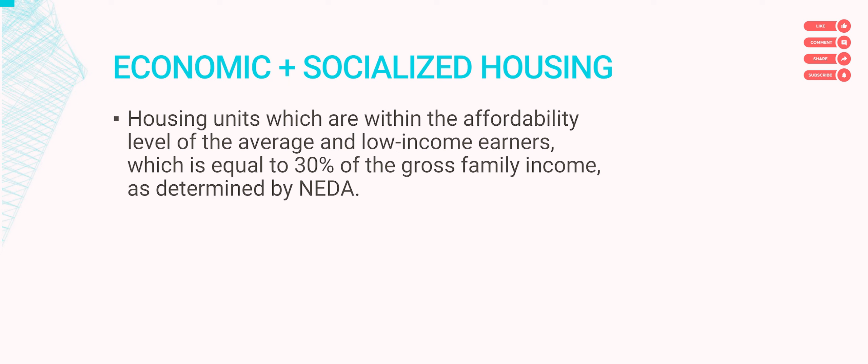According to BP 220, these are housing units which are within the affordability level of the average and low income earners, which are people who can set aside 30% of their gross family income as determined by the NEDA. It's important to emphasize that the standards for low-cost housing or socialized and economic housing are not the same as the standards set by the other laws.

We're going to emphasize that now. The standards for BP 220 are different from the standards of PD 957, PD 1216, PD 1096, which is the building code, and PD 1185, which was the old fire code. The new fire code is RA 9514, but the standards are not the same as in the fire code.

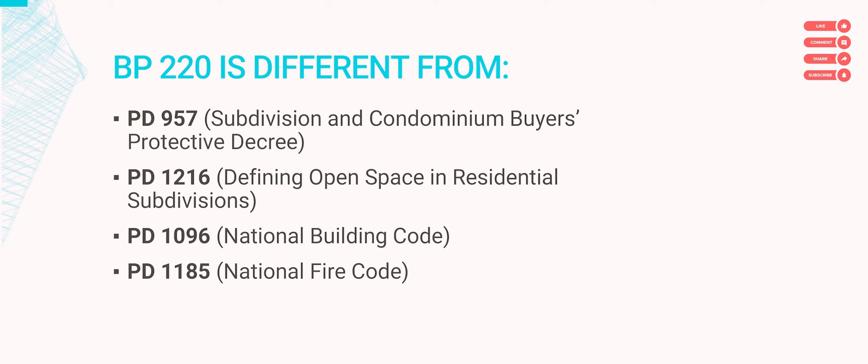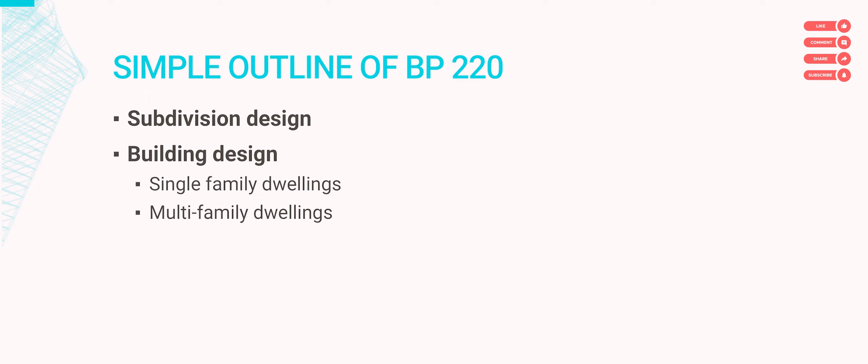So a quick outline of BP 220 before we begin. It's basically two parts. The first part is subdivision design, the second part is building design. In the first part, we'll talk about designing the subdivision, roads, etc. And then we'll focus on the house or the building itself in the second part.

But before we start with the first part, let's quickly talk about this. According to BP 220, the basic needs of human settlements are these six, and they're arranged according to order of importance, most important at the top going down. So the most important is water, followed by movement and circulation, then storm drainage, solid and liquid waste disposal, parks and playgrounds, and lastly power.

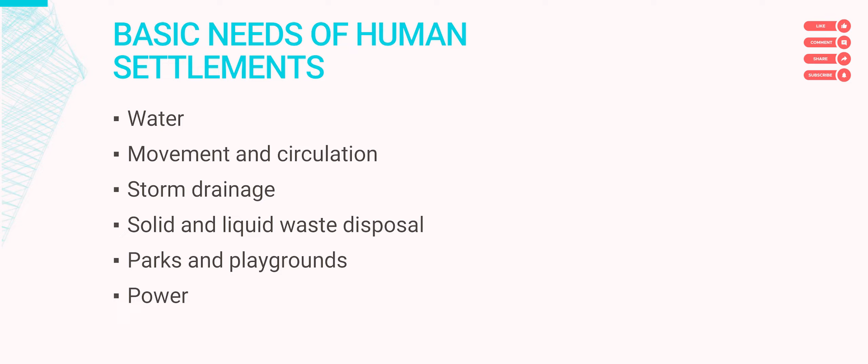Okay, let's define a few key terms. I'm not going to cover all of the terms that were defined by BP 220, but let's go over some of them, the ones that are important to our discussion.

So the first term is socialized housing. These are housing projects undertaken by the government for underprivileged and homeless citizens. The important things to remember here are the words underprivileged and homeless, because that's what really sets this apart from economic housing, which is defined as housing projects provided to average income families.

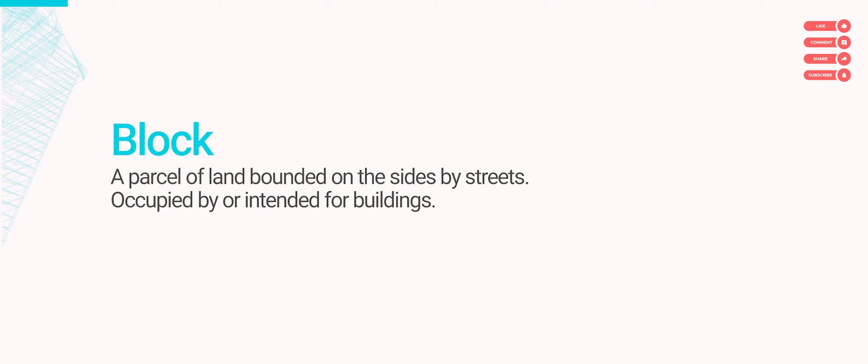We'll also encounter the word block a lot later, so let's define that. A block is a parcel of land bounded on the sides by streets, occupied by, or intended to be occupied by, buildings. So it's land with roads on all sides. Typically, it's going to be subdivided into lots.

Next term is shell house. A shell house is a habitable dwelling unit that includes the following: all exterior walls, the floor, openings for doors and windows, plumbing fixtures, and electrical wiring.

This term, shell house, might make more sense if you know there's another term, complete house. First the shell house: it's a term for a state of the house that's being constructed. Like, when you're building the house, you get to a point where the house isn't yet done, it's not yet fully built, it's not yet complete, but the shell of the house is already there.

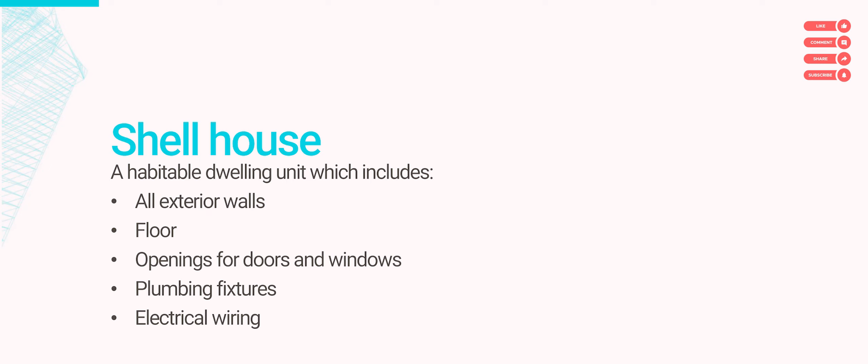So when can you say that the shell is already there, when do you say that you already have the shell house? Again, when these things are present: the exterior wall is done, the floor, door and window openings, plumbing fixtures, and electrical wiring. One thing they didn't mention, which I'm assuming is part of the shell, is the roof. Let's just assume the roof is also complete, because it wouldn't really be a shell without the roof. But bottom line, once these are there, then the shell's there.

Complete is when you have the shell plus the doors and the windows, since door and window openings are all the shell has. With the actual doors and windows there, plus the shell, plus the partitioning, and all of the other things that need to be constructed for the house, then the house is said to be complete.

Okay, let's begin. So two parts: Part one is subdivision design. First, some important planning considerations for subdivisions, like when you're planning the subdivision, these are the things that you need to consider.

First, try to choose a location that's safe, not subject to flooding or to other hazards. Try not to cut down trees that are too big. It's stated that if the diameter of the tree is 200 millimeters or greater, try to preserve the trees.

In the real world, there are rules - yung mga LGU, may kanya-kanyang rules sila usually regarding cutting down trees. You usually need to obtain permits to cut down trees when they're of a certain species, diameter, size, or age. It varies LGU to LGU, but the point is, in BP 220 nakalagay, diameter of 200 millimeters or more dapat i-preserve.

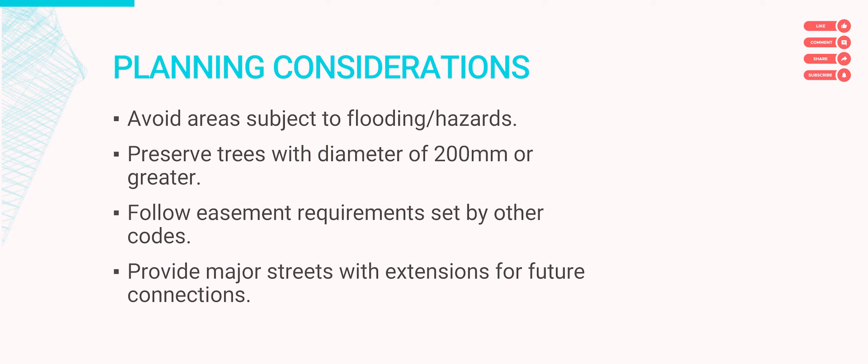Next, follow the easement requirements set by the other code. For this, you'll have to check the building code and the water code. And provide major streets with extensions for future connections.

Another important thing to say this early is that in BP 220, there is no fixed ratio between saleable and non-saleable lots. We have to say that kasi later sa PD 957, meron kasing ratio na ibibigay, parang 70-30 ratio. Pero here in BP 220, there's no such thing. Walang ratio between saleable and non-saleable lots.

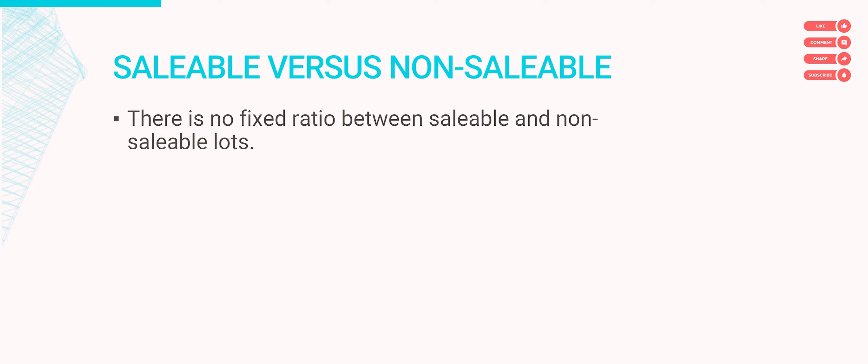Okay, next, parks and playgrounds. Let's take a step back. Yung saleable component ng subdivision is literally yung pwedeng ibenta, yung lote, natatayuan ng bahay. Yung non-saleable components, according to BP 220, is divided into three subcomponents: the parks and playgrounds, the community facilities, and the roads. So isa-isahin natin yung tatlong yun to check if they're required or not. The first one is parks and playgrounds, the first non-saleable component.

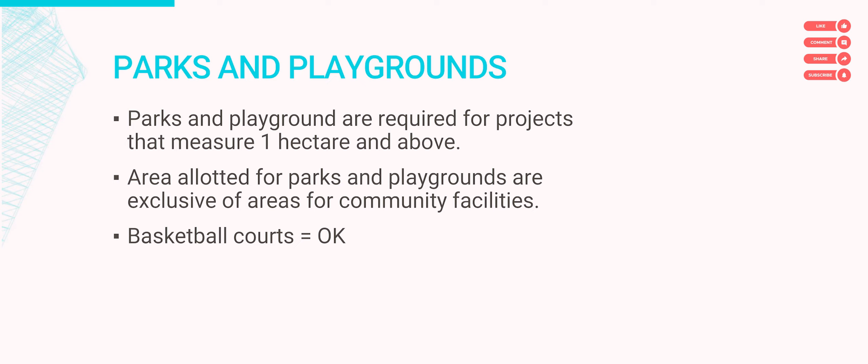Parks and playgrounds are required for projects that measure 1 hectare or above. Subdivisions 1 hectare or bigger dapat may parks and playgrounds. These are to be provided separately from community facilities. Normally po sinabing parks and playgrounds, open spaces yan, green spaces yan. Pero just to be clear, BP 220 is very clear about it - basketball courts may be provided as part of the parks and playgrounds requirement.

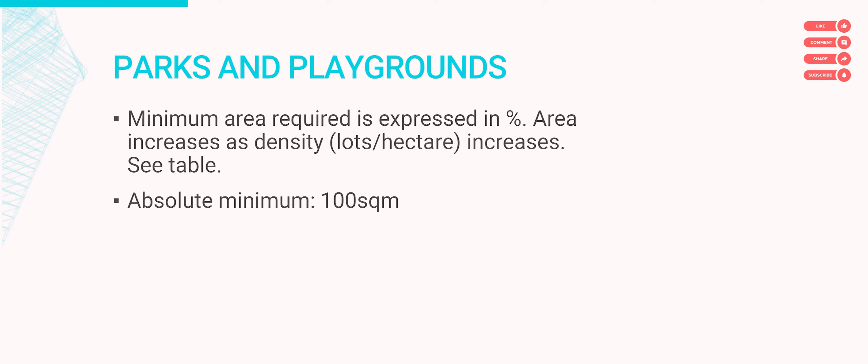Okay, so how big should it be? Because we know when it's required, diba? Kapag daw yung subdivision is 1 hectare or bigger. So how big should it be? There's a table telling us ilang percent ng subdivision yung dapat gawing parks and playground, but the absolute minimum is always 100 square meters. Whatever the percentage is, if you follow it and it gives you a lower number than 100 square meters, you have to bring it back up to 100 because it cannot be less than that. So ito yung table na yun.

So depending on the density of the subdivision, merong prescribed percentage as to how much of the subdivision should be converted to parks and playgrounds.

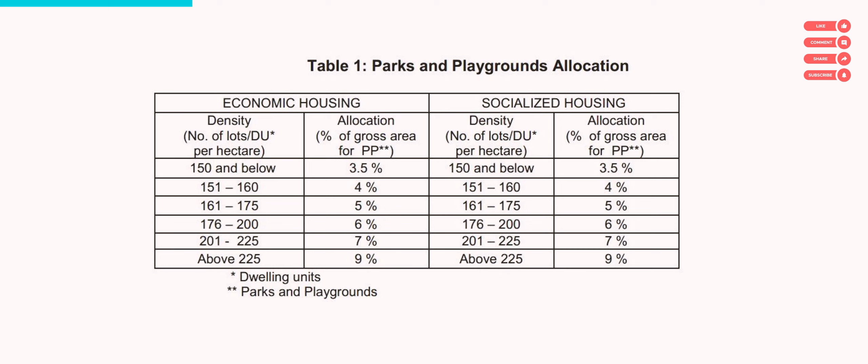Next non-saleable component is the community facilities component. Pagdating sa community facilities, we have a list of facilities that may or may not be required. Let's start with the most basic one, yung multi-purpose center. Ang sabi ng BP 220, a multi-purpose center is required if the project is 1 hectare or bigger. But it doesn't necessarily end there kasi they could also require you to provide a convenience or retail center, an elementary school, a high school, or a tricycle terminal.

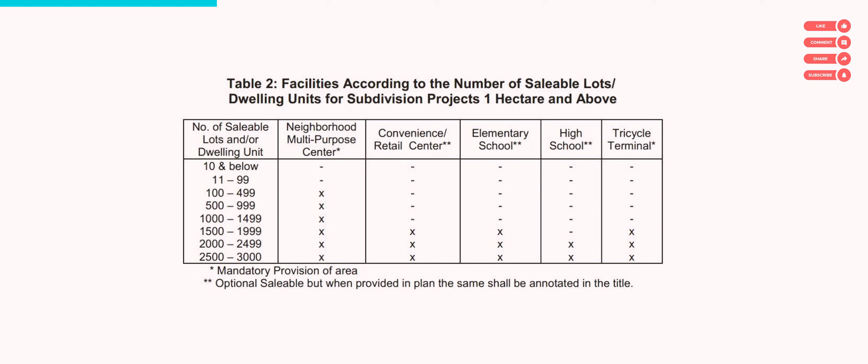This table tells us alin-alin dyan yung required. You know it's required kapag naka-X. Pag may X, ibig sabihin required. Pag walang X, ibig sabihin optional. Whether or not required yung mga ito, whether or not X siya, depends on the number of lots or houses in the subdivision. The more lots and the more houses you have, the more community facilities you're going to need to provide.

Okay, this next table tells us naman how much actual land you should set aside for community facilities. So it's a percentage - it tells you ilang percent. 1.5 or 2% of the subdivision should be set aside for community facilities, depending on the density of the subdivision.

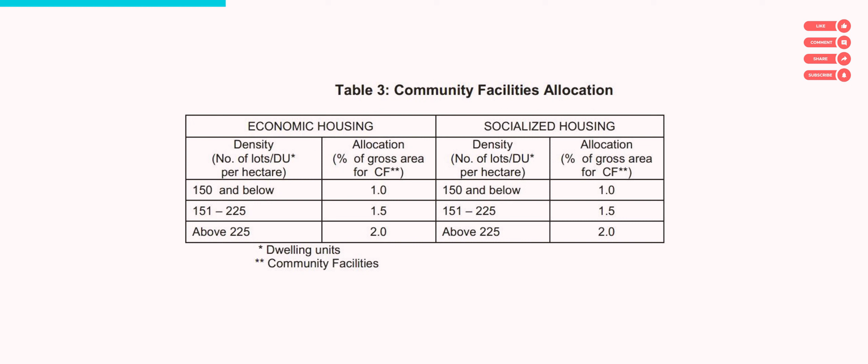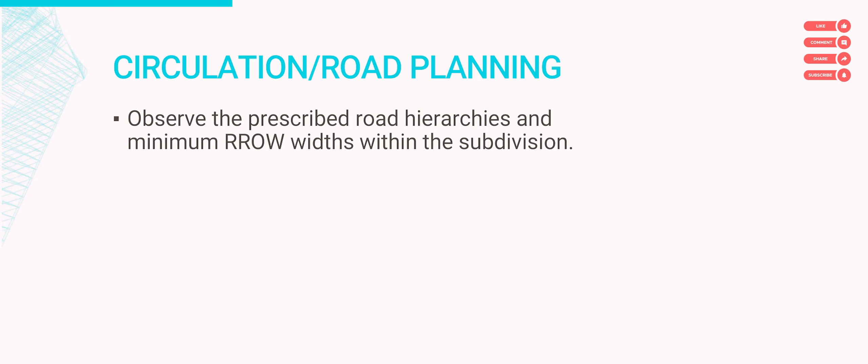Okay, now the last non-saleable component is the road, yung road system. For the roads, walang percentage, walang sasabihin na parang ilang percent ng subdivision yung dapat nakaset aside for roads. Pero meron pinaprescribe na road hierarchy and minimum widths of the roads. Let's start with hierarchy - so yung hierarchy requirement really is about how many different types of roads you should have in the subdivision, kasi the roads in the subdivision, they can't all be the same.

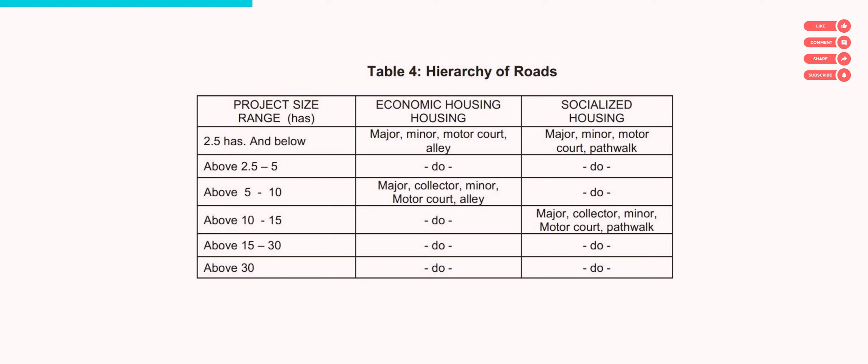But I think the more important thing to study is how wide the different types of road are. Like when we say major road, what do we mean? When we say minor road, what do we mean? That's the second table and the second requirement for road systems. We have minimum sizes, minimum widths. This table tells us that.

As you can see on the table, the minimum width of major, collector and minor roads sometimes vary, especially for collector and major at least - it's not fixed, it changes depending on the project size. For example, if the subdivision is 2.5 hectares in size, the minimum width of the major road is 8 meters. But for a subdivision that's 30 hectares in size, the minimum width of the major road is 12 meters. So it can be a bit tricky dealing with the differing sizes because it's hard to try to memorize all of these when they are not fixed.

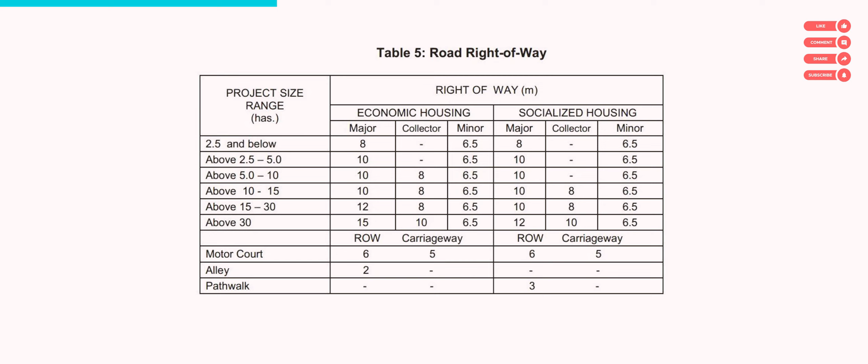For those who can't memorize the changing numbers, I think at the very least you should try to remember the absolute minimum sizes of each. For example, we know that the major road varies, like from 8 to 15. It changes, but the starting value, the starting number, is 8. I think you should at least know that - there's no major road less than 8 meters in BP 220.

So if you can't memorize everything, I think you should at least memorize these minimum sizes, the absolute minimum. No guarantee that it's correct - if the subdivision is big, maybe that's not right. But better than nothing. So anyway, our list goes: alley is minimum of 2 meters, pathwalk 3, motor court 6, minor road 6.5, major and collector roads 8, and interconnecting road 10.

Now that interconnecting road, there's no interconnecting road in this table. So where did the interconnecting road come from? This is the interconnecting road. The interconnecting road is like an access road for subdivisions that are not adjacent to a public road.

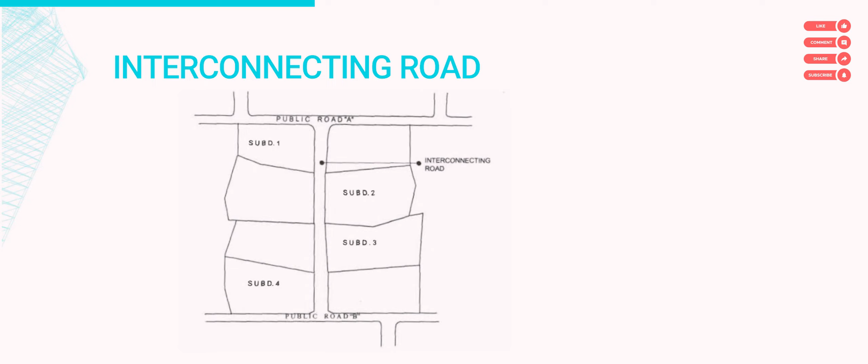So in this drawing, we're looking at two public roads, this one, public road A, and this one, public road B. We have 4 subdivisions, 1, 2, 3, 4. And subdivisions 2 and 3 are not adjacent to a public road, which is a problem. That's what the interconnecting road is for - a road that connects these two subdivisions to the public road. And the minimum width of the interconnecting road, like we said, is 10 meters.

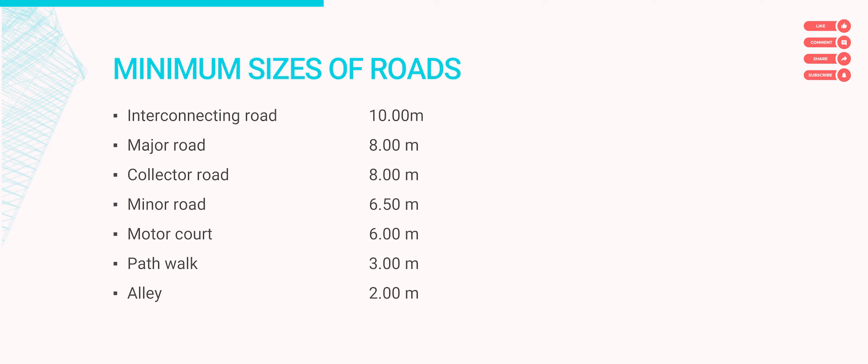We also have to differentiate between the alley and the pathwalk because they're the two smallest road types on our list. So what's the difference between the two? The alley is 2 meters, the pathwalk is 3 meters wide. What's the difference between the two? The smaller one, the alley, is intended to break a block. I'll explain that later. But for now, what's important to understand is that it's too narrow to be used as property access. The road to your property cannot be a 2 meter wide alley - too narrow, not safe.

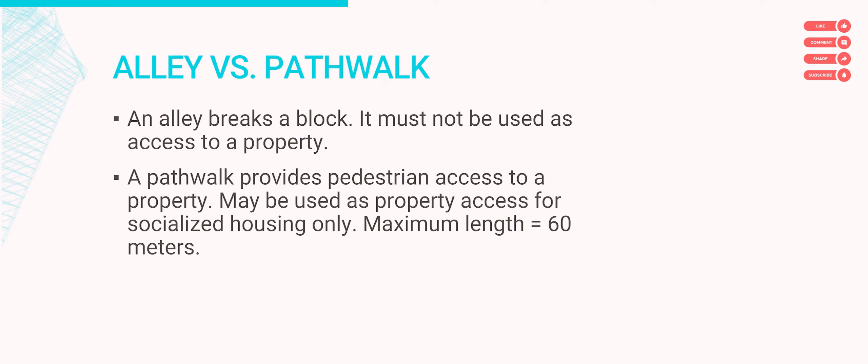What's the issue with that? It's too narrow - for example, in an emergency, emergency vehicles might not be able to reach the house because the access is too narrow. Firefighters might not be able to get there in case of fire because the access is too narrow. So the alley cannot be used as property access. But the pathwalk, which is wider at 3 meters wide, can be used as pedestrian access to a property, as long as it's socialized housing and not longer than 60 meters. Again, the pathwalk may be used as property access as long as it's pedestrian access only, the project is socialized housing, and the maximum length of the pathwalk is 60 meters.

Next, let's talk about the required setbacks for public utility vehicles. So what you're looking at is the subdivision gate essentially. This is the gate of the subdivision, and this is the public road.

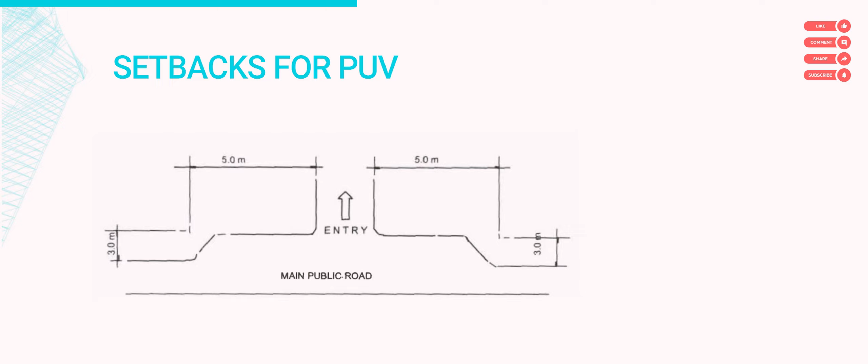Ang sinasabi ng BP 220, both sides of the gate dapat merong setbacks for public utility vehicles measuring 3 by 5, 3 by 5.

Okay, now let's talk about minimum lot areas. Very important. The issue right now with the minimum lot area requirement is it was recently revised by a memo from the HLURB. But before I show you the revised version, let's look at the original version first. In the original version of BP 220, or before the memo at least, the minimum lot area required for single detached was 64 kung socialized and 72 kapag economic.

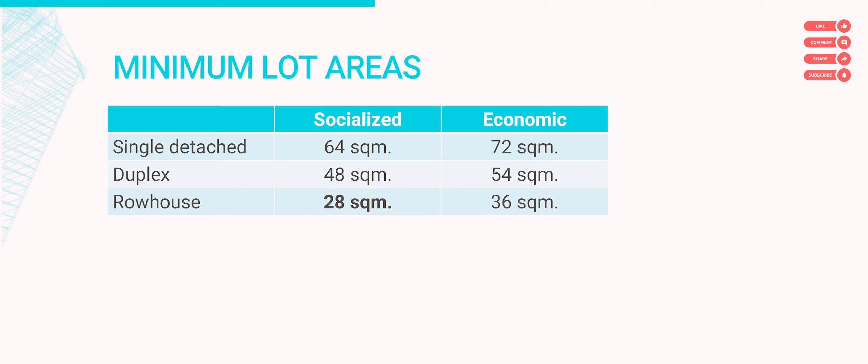Kapag duplex, 48 yung socialized, 54 square meters yung economic, and kapag row house, 28 square meters yung socialized, 36 square meters yung economic. Now, in the memo that was released recently by the HLURB—

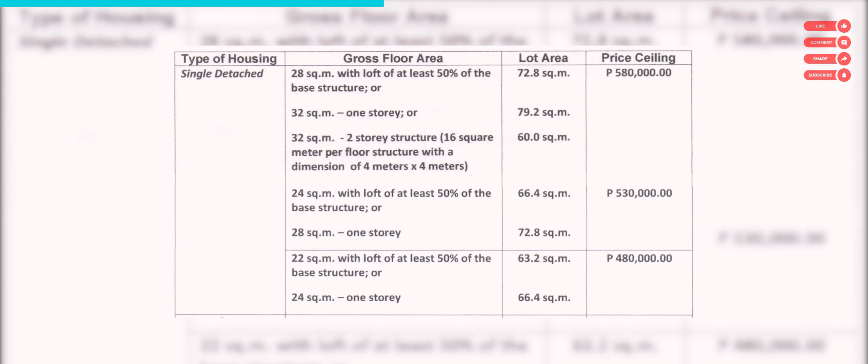You can look it up. It's the HLURB Resolution 973. Binago nila yung lot area accordingly with the prices, the revised pricing links for each parang tier or classification. So anyway, ito yung single detached, ito yung duplex, and ito yung row house. So let's look at single detached.

So what they did was, essentially, meron three price ceilings. May tatlong price categories tayo: 580K max, 530,000 pesos max, and 480,000 pesos max. And for each price category, merong minimum GFA yung house. Ang complicated lang ngayon dito is—

there are different configurations. Hindi siya parang isang minimum lang. The minimum changes depending on the configuration of the house. Like for example, at 580K, you have three configurations available. You have a 28 square meter house with a loft equal to 50% of the base structure.

So ibig sabihin, ground level na 28 square meters. And meron siyang loft, parang mezzanine or parang almost like a second floor, whose size is at least kalahati ng 28. Okay, so that's one option. The minimum lot area required for that is 72.80 square meters.

Another option is a 32 square meter one-story house for which a lot area of 79.20 square meters minimum is required. The last option for this price point is a two-story structure, 32 square meters, meaning 16 square meters per floor, 4 by 4 meters yung footprint. Lot area required for this one is 60 square meters. Okay, so on and so forth.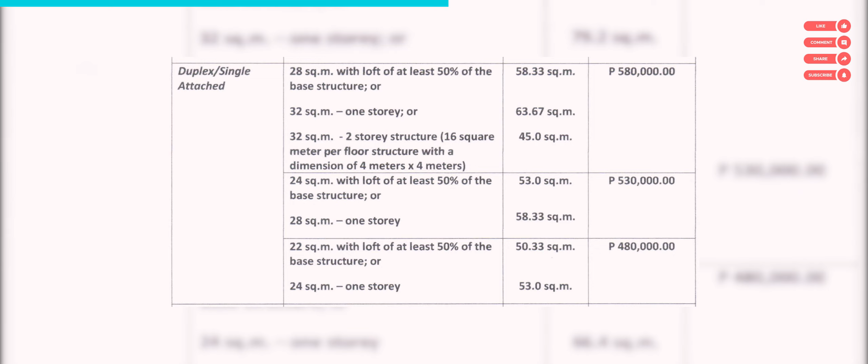Let's continue. For those pala who don't know what a loft is, ito yung official definition. It's a partial intermediate floor in any story or room of a residential unit with an area of one half of the area of the room or space in which it is located. That's what they said in the resolution, HLURB Resolution 973. Okay, minimum ceiling height required for the loft is 1.8 meters.

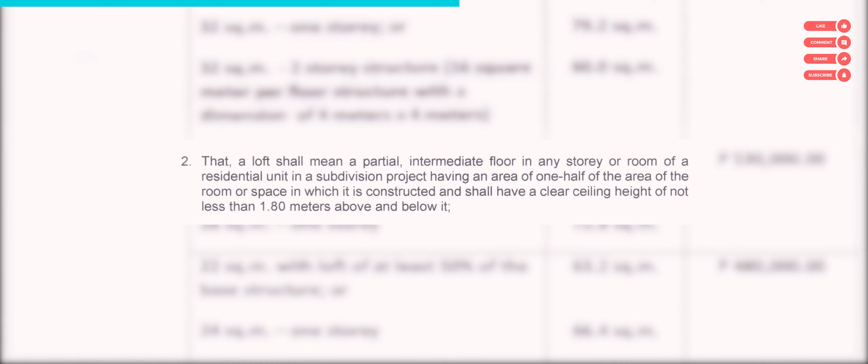Okay, what remained the same is yung lot frontage. Walang binago sa required lot frontages. As you can see here, depending on the configuration of the dwelling, kung single detached ba siya or duplex or row house, may required minimum lapad yung lote. So sa single detached, we have, well, depending on the lot type, we have 4 required frontages.

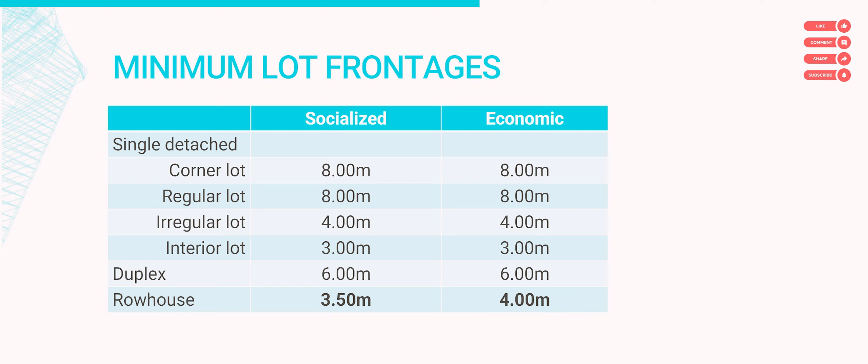Kung corner lot, 8 meters, for both socialized and economic. They're the same one for both. Regular, 8 meters also. Irregular lot, 4 meters wide. And interior lot, 3 meters wide minimum. For duplexes, 6 meters. And for row houses, magkaiba yung socialized and economic: 3.5 minimum yung socialized and 4 meters minimum yung economic. Again, ito yung minimum na lapad ng lote.

Let's talk about row house clusters next. So ito yung, di ba, row houses are parang multiple dwelling units located side by side. Ang tanong is like, how many row houses in a cluster can you do?

Because you obviously cannot do 1,000 houses in a row, or even 500 houses in a row. It's too much, right? So where do we draw the line? Where are you required to stop? Let's look at the answer.

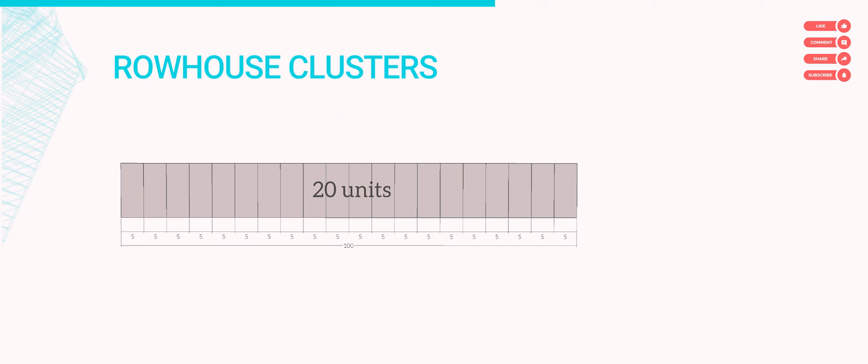According to BP 220, 20 row houses maximum, or 100 meters long maximum per cluster. Once you reach either of those two limits, 20 houses in a row or 100 meters long, you need to stop or end the cluster there.

Next, let's talk about block lengths. A block is a parcel of land with roads on all sides, typically subdivided into lots. But the point is, the maximum length of a block is 400 meters.

And once you reach a length of 250 meters, you must provide an alley down the middle. This is what we call breaking the block, breaking the block with an alley. Once you reach this length of 250 meters, there should already be an alley in the middle, which again is 2 meters minimum width for the alley.

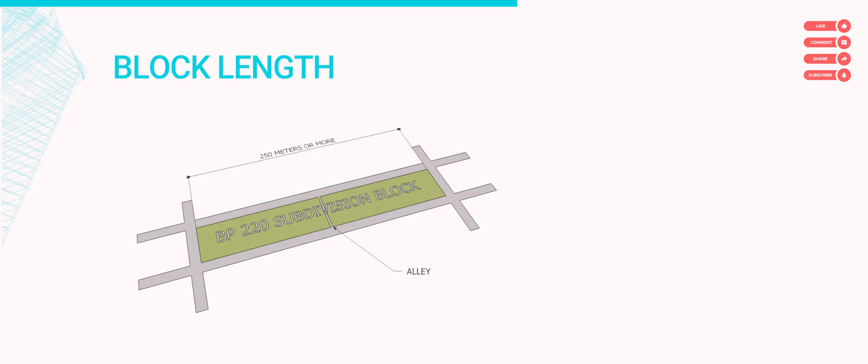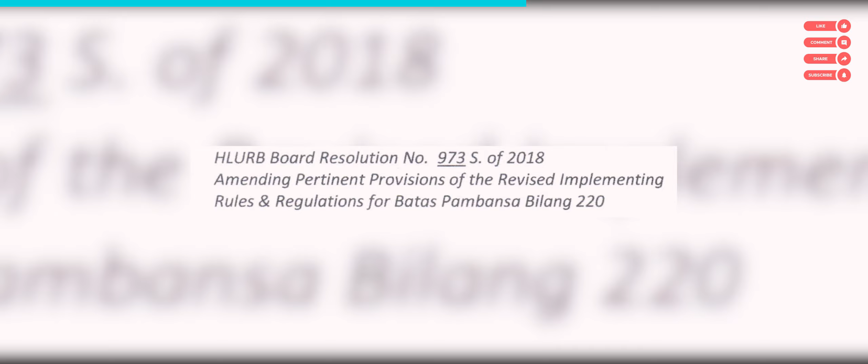For the minimum floor areas, you must follow this. This is the minimum floor areas now under HLURB Resolution 973. The old one is superseded. Let's move on to this minimum level of completion.

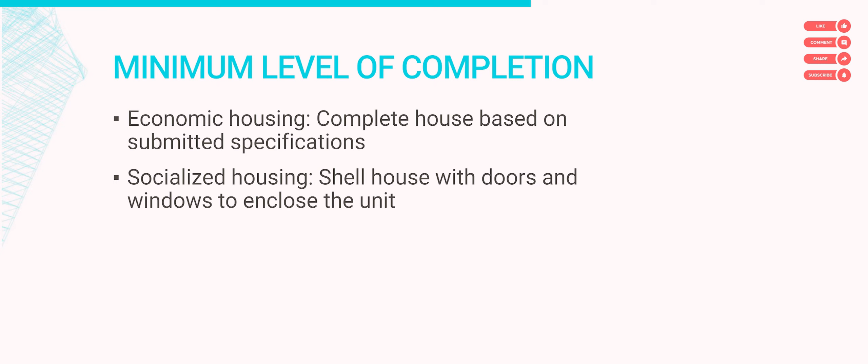For economic housing, it should be a complete house, but for socialized housing, a shell house is allowed, with doors and windows to enclose the unit.

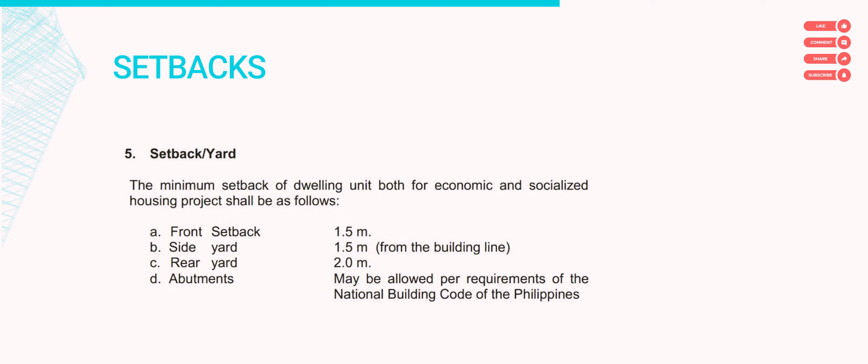If you compare that to the building code, you'll notice that in the building code, the front setback is the biggest, and the others are just small. Here it's reversed, probably because when you're working with really small lot sizes, the rear setback becomes important since the rear is usually functional. Usually the rear setback is used as a service area, like a laundry area, etc. So probably that's the reason why they made the rear setback larger than the others.

Now we get to the second part, which is all about the building itself, building design standards. We're going to give you the standards first for single-family dwellings and later multiple-family dwellings. For single-family dwellings, again, backlots may be used as property access for socialized housing, like we said earlier.

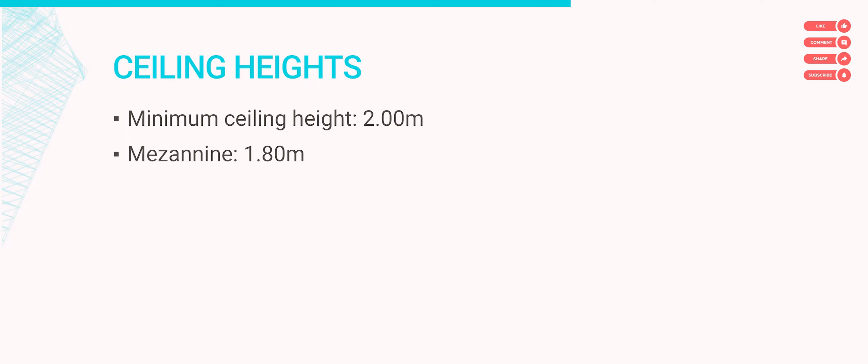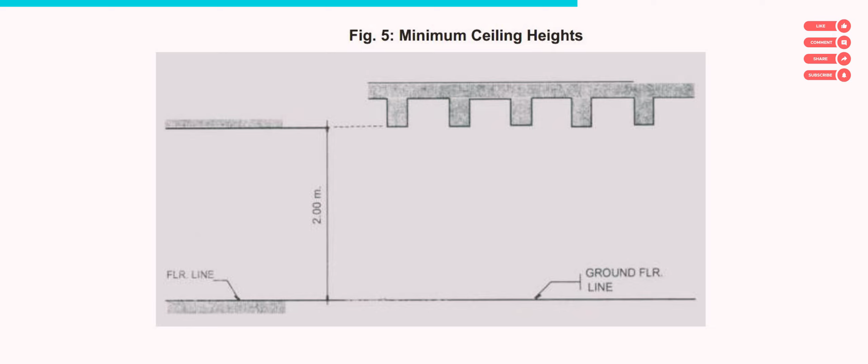Required ceiling heights, minimum only, 2 meters. For mezzanine, minimum 1.8. Now the minimum 2 meter ceiling height for socialized housing and economic housing should be clear ceiling heights. Meaning, if there are protruding beams above, we measure the 2 meters from the floor to the bottom of the lowest beam.

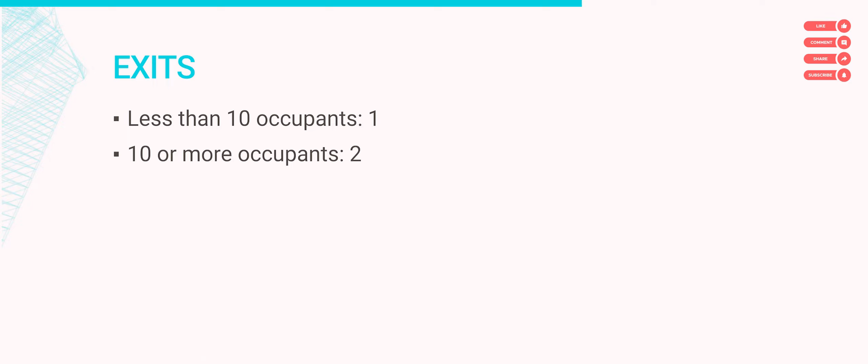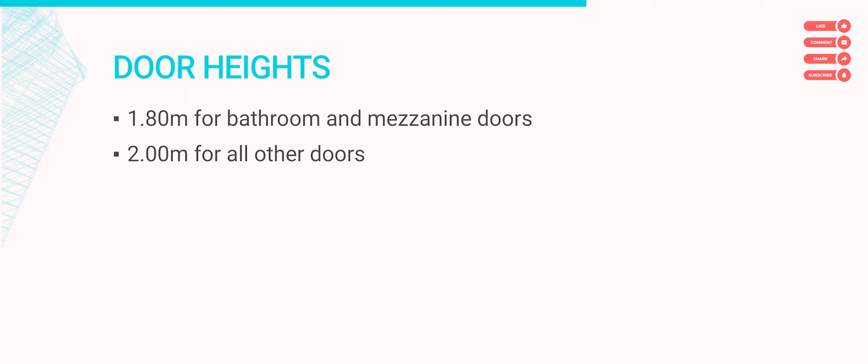Mezzanine is 1.8, which is the same as the building code, so this is pretty much self-explanatory already. Exits, 1 exit required for less than 10 people, and 2 if 10 or more people will live in the house. As for doors, 1.8 meters minimum for bathroom and mezzanine doors. All other doors, minimum 2 meters.

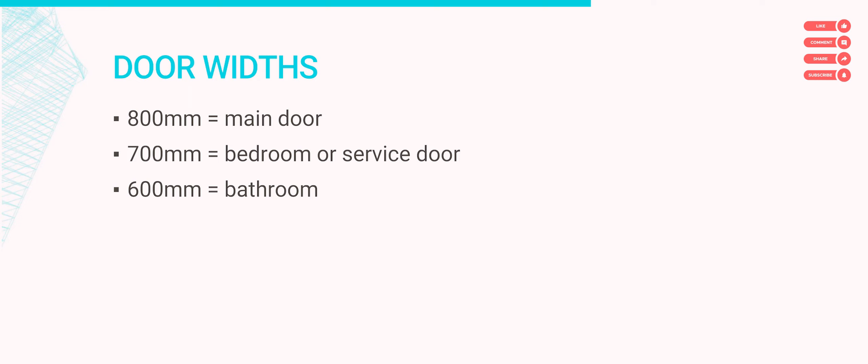For door widths, main doors 800 millimeters minimum, bedroom or service doors 700, and bathrooms 600 millimeters minimum. All of these are just minimums. You can make it wider if you would like a wider door.

Now, this illustration is from BP 220. The dimensions for some reason are not complete, but the first one, the middle one, is 700 millimeters wide by 2 meters tall. This is probably a service or a bedroom door based on the dimensions. This other door is 2 meters tall, but the width was not specified, but I would imagine that this is 800 millimeters wide since it looks wider than the first one. And if it's 800 millimeters wide, it's probably a main door.

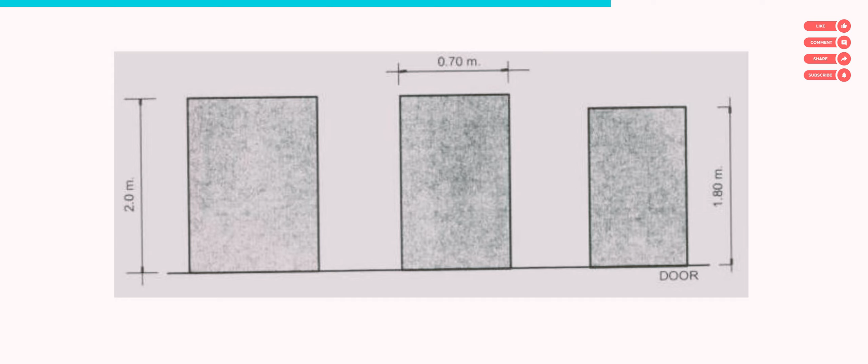And the one on the right is a shorter door, 1.8 meters tall. If that is 600 millimeters wide, then that is probably a bathroom door, since that's the minimum size or minimum dimensions required for the bathroom door.

Alright, for windows, same actually as the building code. The general requirement is that the total window area should be equal to at least 10% of the floor area. Bathrooms, 5% of the floor area.

Now next is stairways, hagdanan. This is where we see significant deviations from the building code. The maximum riser for BP220 staircases is 250 millimeters, which is actually high compared to the building code, where 200 millimeters is the maximum. Minimum tread in BP220 is 200, but in the building code the minimum is 250. Minimum width is 600 millimeters, which is narrow. In the building code, the narrowest allowed is 750, and that depends on the occupant load. If there are more occupants, sometimes 900, sometimes 1.1 meters. Here it's 600, which is really narrow. Headroom is 2 meters, and landing to landing distance is 3.6 meters maximum.

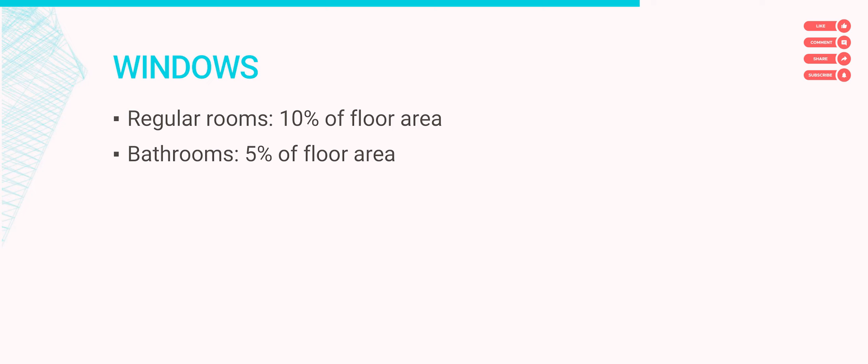Let's start with the mistake. This is actually wrong. I don't know why the drawing in BP220 turned out this way, but this is wrong. The problem is it says riser height, 0.25 meters minimum. Please remember that the 0.25 meters is supposed to be maximum, not minimum. That's a very important distinction because the meaning of the requirement totally changes when you swap maximum for minimum. If you say 0.25 meters minimum, it sounds like higher risers are better, like you're setting a minimum when higher is supposedly better. So this is obviously wrong because a higher riser isn't better. Make sure you understand that now. When you look at BP220, I hope you know this isn't correct. 0.25 maximum is what's written in the text, and that's correct.

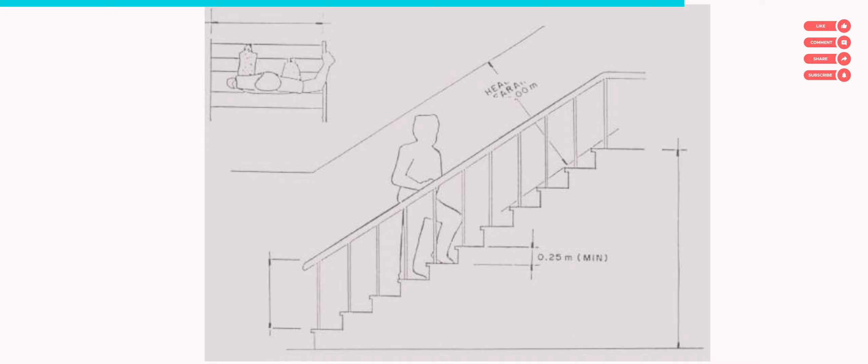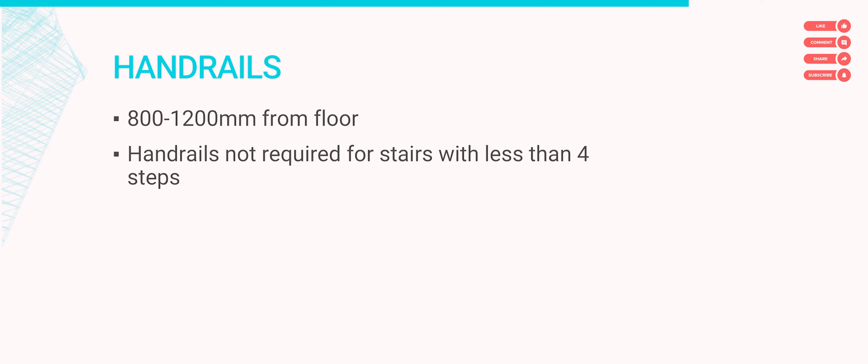Next for the tread, they didn't measure it, but the minimum tread is 200. The width is 600 minimum. Maximum distance between landings is 3.6. Headroom is minimum 2 meters. I think the headroom should be measured vertically, not like that, but basically 2 meters is the minimum headroom. We haven't mentioned this yet, but it's in the next slide. The handrail height is 0.8 to 1.2 meters from the floor. And just like in the building code, handrails are not required for stairs with less than 4 steps.

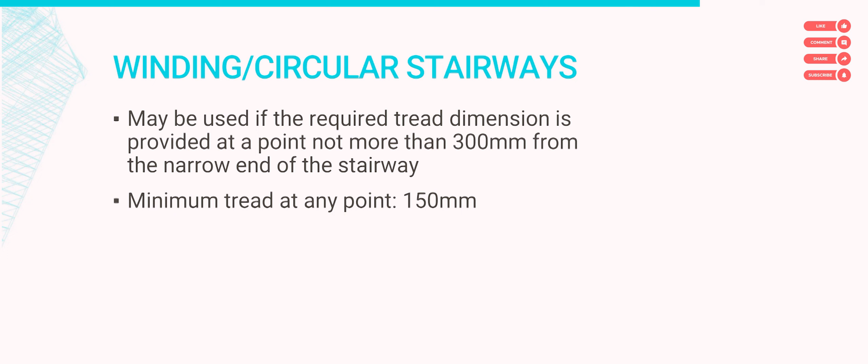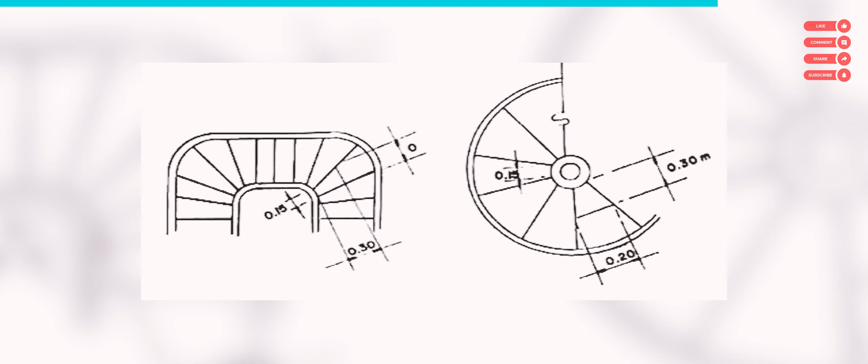Winding and circular stairways, similar to the building code requirement, can be used as long as the required tread dimension is provided at a point not more than 300 millimeters from the narrow end of the stairway, and the minimum tread at any point should be 150 millimeters. To illustrate what we're saying, here it is. This is a winding stairway, this is a circular stairway. We can use them as long as the required tread... this is wrong here, it became 0. Again, that's a mistake in the BP220 illustrations. Let's go to this one instead, their drawing is better here because at least it's correct. The required tread is 200, 0.2. For winding and circular stairways, the 0.2 tread should be provided here. This is 300 millimeters from the narrow end. This is the narrow end. You measure, offset 300 from the narrow end, and at this point it should be at least 200 millimeters. And the narrow end cannot be less than 150 millimeters.

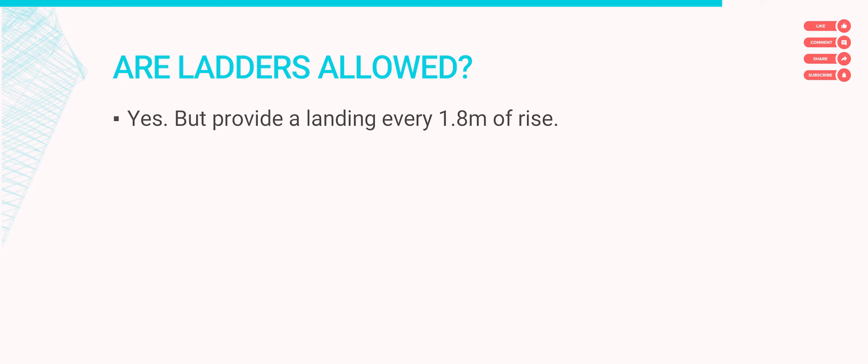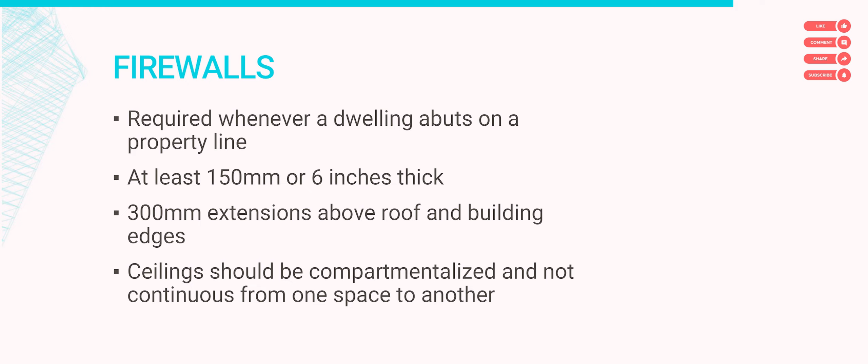Are ladders allowed? According to BP220, ladders can be used as long as there's a landing every 1.8 meters of rise. Firewalls are required whenever the dwelling reaches the property line. If it touches the property line, obviously there should be a firewall. Minimum thickness required is 150 millimeters or 6 inches. Extensions of firewalls are 300 millimeters minimum on all sides. It's much simpler than the building code, where it varies, like 400 above the roof, 300 under the eaves, etc. Here it's just 300 on all sides, very simple.

And finally, we get to multi-family dwellings. These are the standards for multi-family dwellings. Earlier, we covered single-family dwellings.

Now we're going to discuss multi-family dwellings kasi some standards are not the same. Some standards here are different.

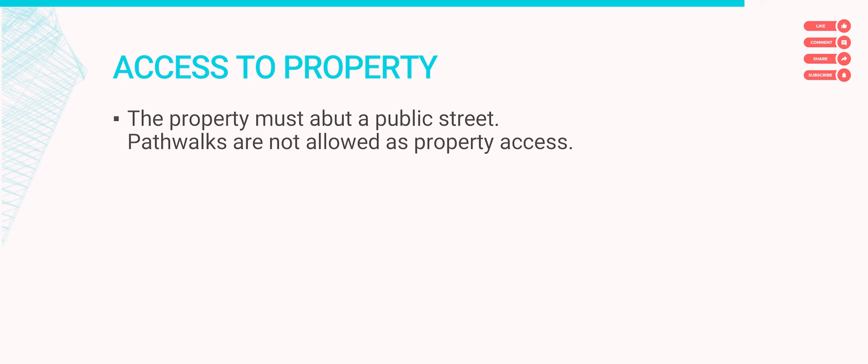First, bawal ang pathwalk as property access for multi-family dwellings. What that implies is dapat yung property nakadikit sa public street. Hindi na pwedeng pathwalk lang ang property access.

Next, merong required distances between buildings kapag multifamily dwellings depending on the height of the building. The general rule is the taller the buildings, the farther apart they need to be. For 1 to 2 story buildings, the required distance between buildings is 4 meters. Between roof eaves, 1.5.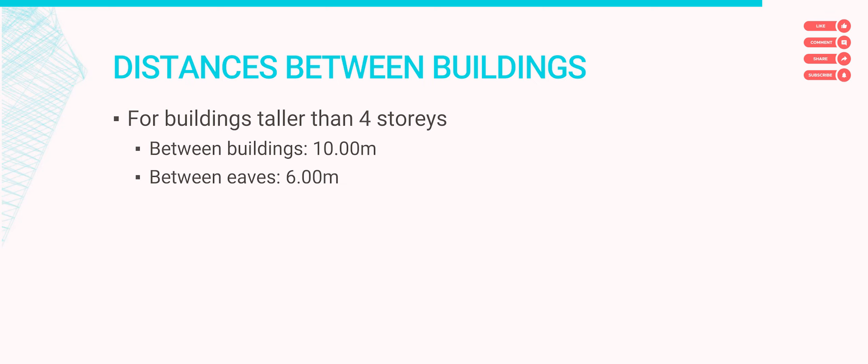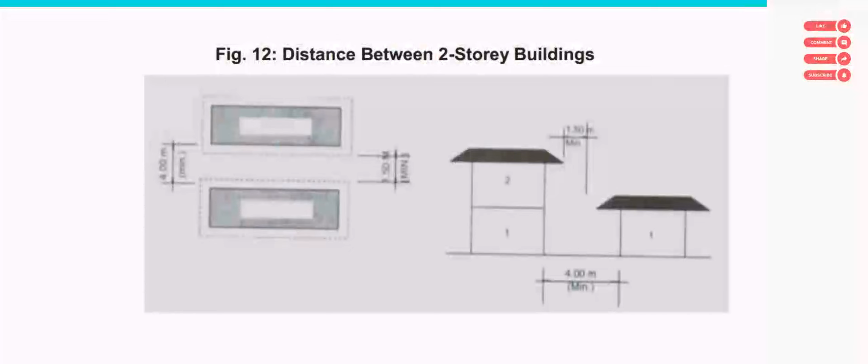If you make the buildings taller, the required distances become bigger. For 3 to 4 story buildings, the required distance between buildings is 6 meters, between eaves 2 meters. For buildings taller than 4 stories, 10 meters na yung required distance between buildings and 6 meters between roof eaves. So to illustrate, ito yung sinasabi natin, ito yung required distance between buildings. In the case of 1 to 2 story buildings, 4 meters dapat yung minimum distance nila. Between eaves, 1.5.

The only exception to this requirement is blank walls. First, let's define muna ano ba yung blank wall. A blank wall is a wall with no openings, walang butas yung wall, like a firewall. A wall with no openings or only minimal openings for comfort rooms - either walang butas or kung meron man, maliit lang na window for comfort rooms.

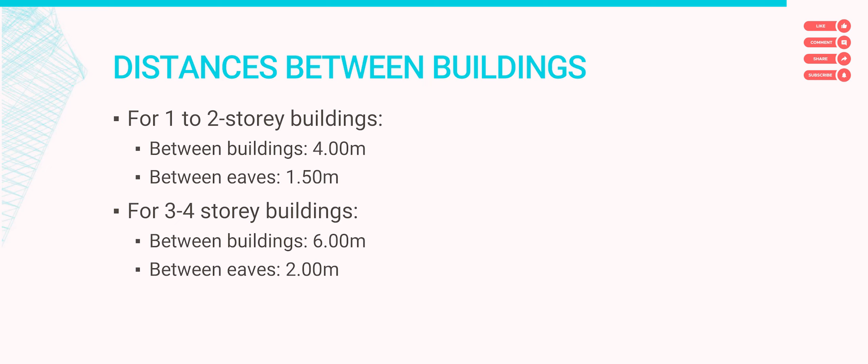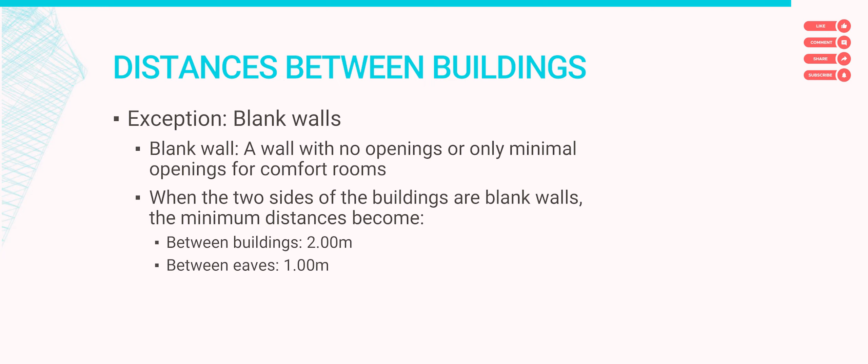Why are we talking about blank walls? Because when the two sides of the buildings facing each other are blank walls, you can actually bring them closer together than the normal required distances for buildings, if the walls facing each other are blank. When the two walls facing each other are blank, those two buildings can be brought closer together. How close? Between buildings, 2 meters lang ang required. Between roof eaves, 1 meter lang ang required.

Ito yung illustration from BP 220. I have a slight issue with this. Kasi, well, first of all, floor plan yung nasa taas, elevation or section yung nasa baba. So ito yung floor plan, multi-family dwelling. You see here, 2 meter yung distance nila - blank walls lang, 2 meters lang yung gap between buildings and 1 meter between roof eaves.

And sa elevation, pinakita nila, the walls are blank. Ang problem is, yung long side, yung pinapakita nila sa elevation, they're showing that the long sides are blank. Pero yung 2 meter distances ay between the short sides. What am I trying to say? Ito dapat yung blank - dapat yung short elevation yung pinapakita. This and this, they both should be blank. And if they're both blank, then yes, 2 meter gap between them is fine. We don't really care so much about the long sides kasi hindi naman sila yung pinagdikit 2 meters close.

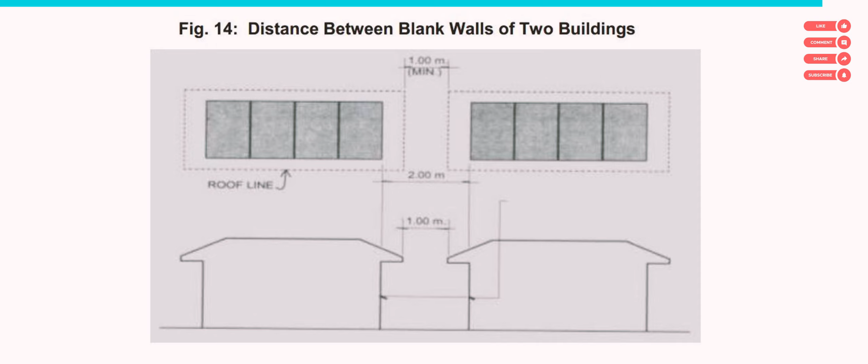Pero you get the idea. If this wall and that wall, if they're both blank, then 2 meter distance between them is allowed.

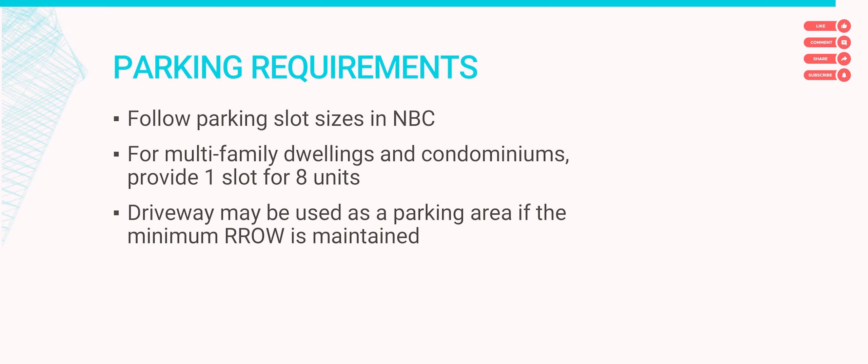Parking requirements, for the slot sizes, we just follow the building code. For multifamily dwellings and condos, ang ratio is 1 slot for every 8 units. And the driveway may be used as a parking area as long as the minimum clearances are maintained - meron drawings ang BP 220 about that for further review. But right now, ang pinaka-importante is the same parking slot sizes required by the building code apply to BP 220. And off-site parking is allowed by BP 220 as long as it isn't more than 100 meters away, which is similar to the building code actually.

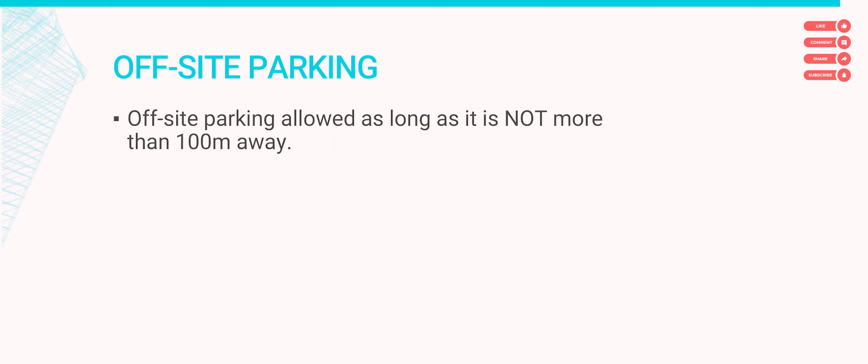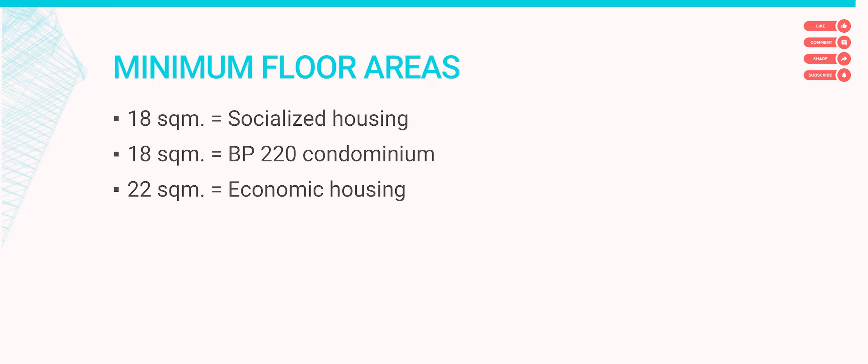Minimum floor areas - ang nakalagay dito, again, these minimum floor areas might have been superseded already by the resolution. Pero itong term na BP 220 condominium, if it comes up in the exam, ang nakalagay na required minimum for BP 220 condominiums is 18 square meters. The others, yung 18 for socialized and 22 for economic, it's best to refer now to the new memo, yung HLURB resolution 973 for the required sizes per price point.

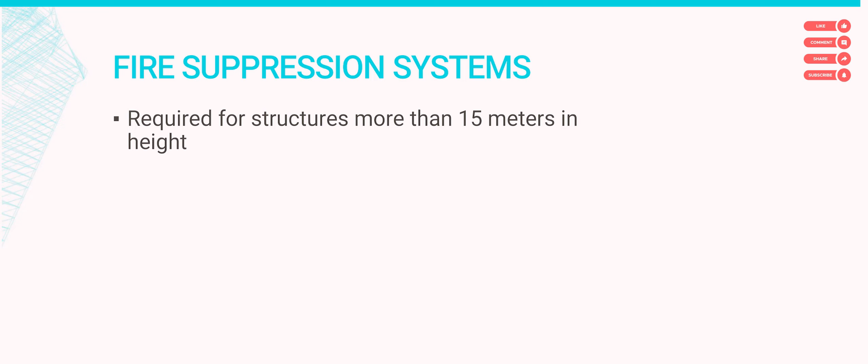Exit and corridors, just follow the building code and the fire code. Fire suppression systems are required kapag the structure is more than 15 meters tall. Elevators are also required kahit pa low cost dyan if the building is 6 floors or higher. The elevator's design must of course conform to the requirements of the building code in BP 344.